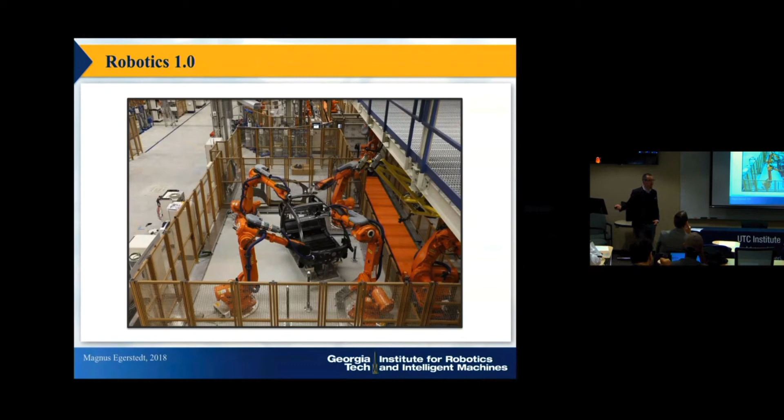Well, so here is actually, I've started calling this the Great Robot Migration. So here's what's going on. The robots are leaving Rome, and actually where they're going is not Carthage. They're going all over the place, right? So we're seeing a lot of robots on the farm fields. So precision agriculture has become a major force in robotics. Part of it is farms are not that complicated, meaning, corn rows are nice and straight, and there are very few stray puppies and bicyclists running around.

We're seeing warehousing being largely robotic. Amazon Robotics now claims to have completely dark warehouses, where there are zero people, only robots. I have a former student who works for Amazon Robotics, and I asked if this was really true. He said, not exactly, because people still have to go in every now and then and clean up after the robots. So we're becoming cleaners for our robotic overlords.

We see robots in our homes, on the battlefields, in hospitals. Medical robotics is a major driver. As they leave their cages, they go all over the place and change their morphology or form. Robots are no longer just these things; they are flying, rolling, slithering things.

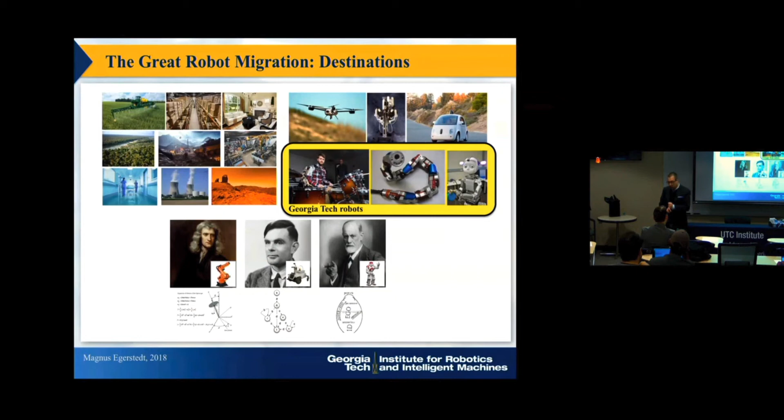You need to understand perception, learning, AI, and psychology. Human-robot interaction is a major thrust. NSF has something called the National Robotics Initiative that is entirely focused on trying to bridge these three gaps. This is what makes it kind of interesting, challenging, and satisfying to run a robotics institute.

I want to show you how we are organized to actually address this. We are lined up around three thematic areas. One is autonomy—robots out in the world making decisions based on what they see. These may be rolling, hopping, swimming, flying, or walking robots.

Then we do quite a bit of work on human augmentation—robots used to make the human experience richer. This could be orthotic or prosthetic devices, or exoskeletons. Medical robotics also falls under this category. And then we do a lot of work in collaborative robotics—robots and people doing things, typically in a manufacturing setting.

We are one of the largest institutes on the planet. We have 85 faculty members in robotics. We started a robotics PhD program recently, and we're now up to 70 robotics PhD students. We do around $33 to $34 million in sponsored research every year. That's the kind of institute I run.

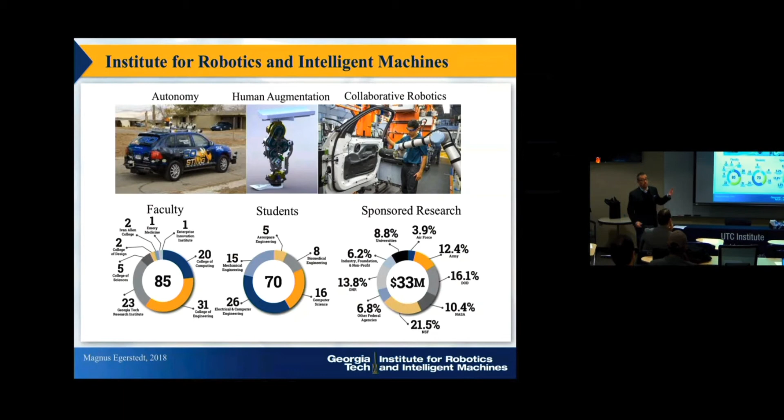I've actually learned quite a bit today from talking to people involved in the institute we have here. So having said that, let's actually get back to the talk.

When I give talks, a lot of times I talk about how you structure interaction models for large teams of robots. Let's say you're all robots. Congratulations—you're also kind of not that talented, to be honest. You can't see very far, you have limited communication capabilities, maybe limited processing capabilities. But I'd like you to solve a task: let's say I want you to form a circle. How do you, with very limited information and only local rules, move around in such a way that you form a circle?

Or maybe more importantly, I learned there is special artisanal UConn ice cream somewhere on campus. So what if I sent you all out to get me ice cream? Please don't leave—but what if? How do you organize yourselves so some of you go out, cover the area, look for ice cream, some of you carry the ice cream, but then your hands get too cold, so you hand it over to the next person? What is the mechanism by which we do this?

Ten years ago, we really didn't know all that much about how to structure multi-robot systems. Fast forward to today, and we really have understood quite a bit.

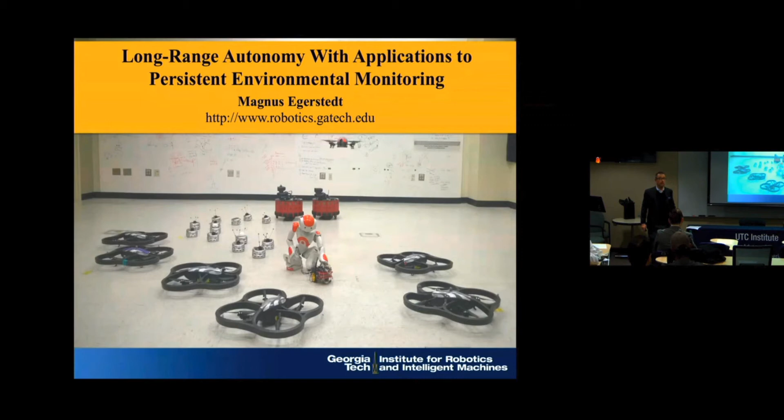So a normal talk that I would give would talk about this, and then I would end with a slide kind of like this one.

So here I have 15 robots that are, in this case, spelling grits, because I'm the director of the Georgia Robotics and Intelligent Systems Lab. What we're doing is broadcasting what letter they should shape—let's do I. They know the geometry of this, what I looks like. And then they need to figure out where to go in the I, how to assemble it so that they don't collide.

In this case, it's based solely on sensory information, so no communication, with local rules. And again, 15 years ago, we didn't know how to do this. Now we understand quite well what the right mechanism is for doing this.

So this is a typical last slide. I think it's a good ending to a talk, right? Because we show robots doing interesting things.

But what I've gotten really interested in over the last 5 years is this question: what if you wanted to do this out in the snow instead? Or you wanted to do it in the fall, and then winter came, and there was snow, and then it stopped snowing, and then it's April, and it's snowing again. How does that change the design paradigm?

So one thing that's clear is if I try to design my system so that I enumerate everything that the robots are going to experience through their journey through the snow, then I'm doomed to fail, because stuff is going to happen that we can't predict. So somehow we need to be flexible enough to handle things that aren't part of the design.

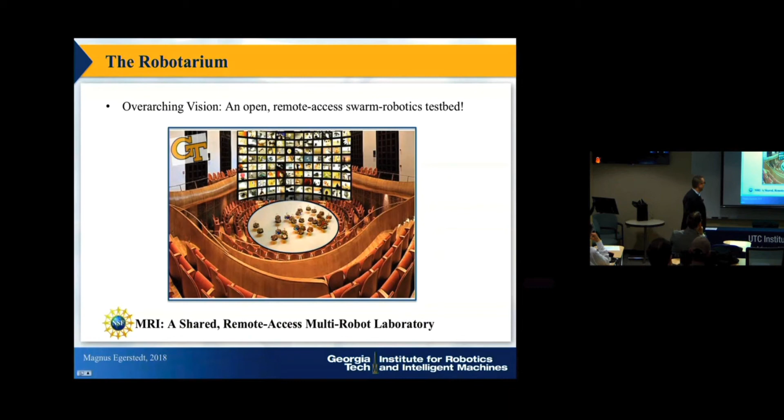And I went to the National Science Foundation, and I said, here's what I want to build. This is actually the Vienna Chamber Orchestra's concert hall with Harvard's kilobots on them and some random stuff and a GT logo on it. And NSF, they said, sure, do it. So this is what I built. Not quite the Vienna Chamber Orchestra. Actually, this was an early version.

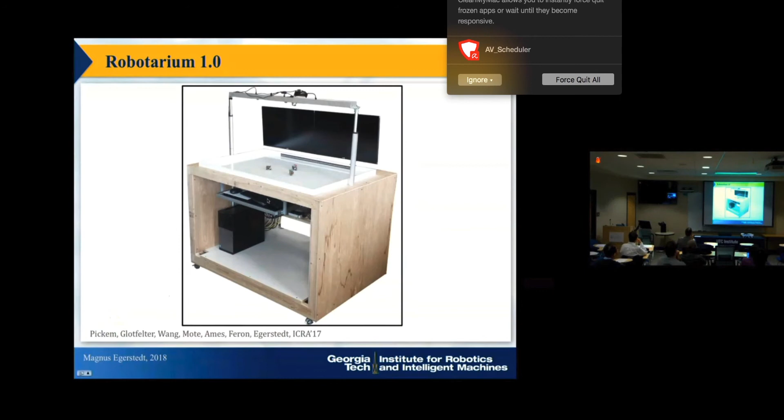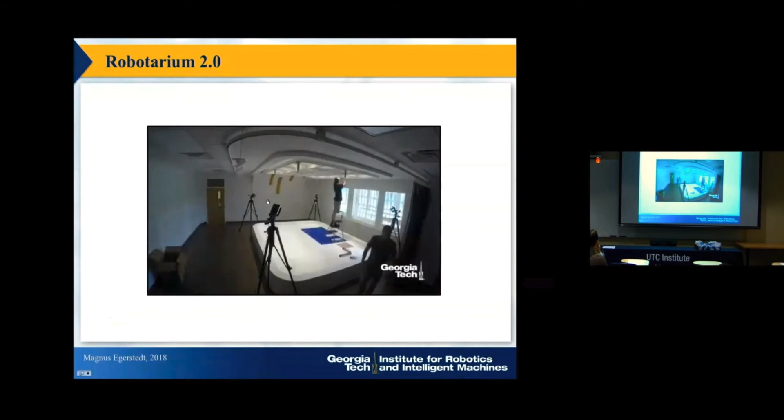But the point is, we built a remotely accessible swarm robotics lab. Actually, now it's looking quite charming. So we built a facility that went live in August of last year with 120 ground robots and 30 aerial robots. And this kind of became a big deal.

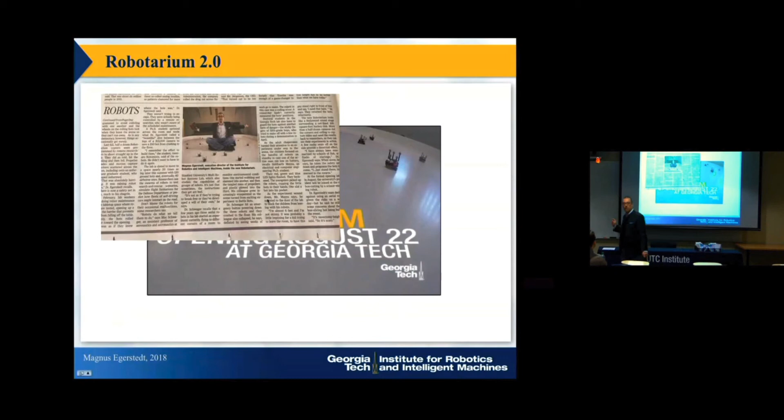I was on the front page of the Wall Street Journal with the headline, this lab has no idea what its robots are doing. But the idea was very simple. Users upload code, run it on the Robotarium, and get the data back.

The problem is, let's pick someone here. What's your name? Evan. Evan. You seem completely reasonable.

Well, we don't know, right? So you upload code, and how do I know you don't break stuff? Even if I don't know, especially in the air. The problem is that stuff happens in robotics, right? So here's Evan. He's telling my robots to do something, and you weren't that reasonable. Yeah. Stuff happens all the time. So how do I make Evan be allowed to upload code on the Robotarium without him breaking stuff?

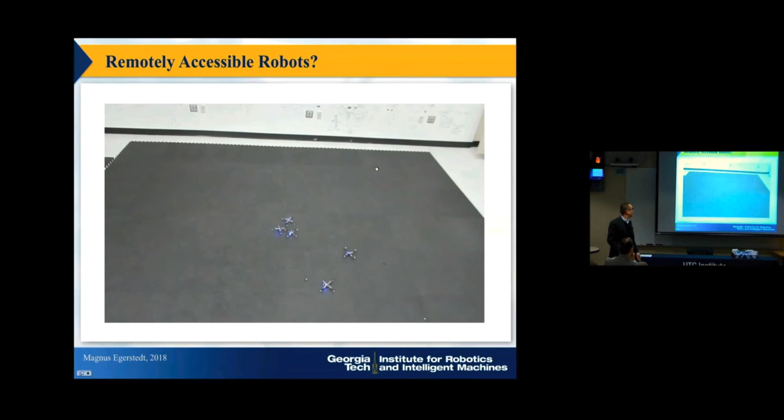And the biggest question is really a question of collisions, right? So how do you avoid collisions? This is, I think, the most famous robotic collision. This is the DARPA Urban Challenge 2007. Here's MIT's car, and here's Cornell's car, and they're autonomously driving into each other. They're still actually bitterly arguing over who was really at fault.

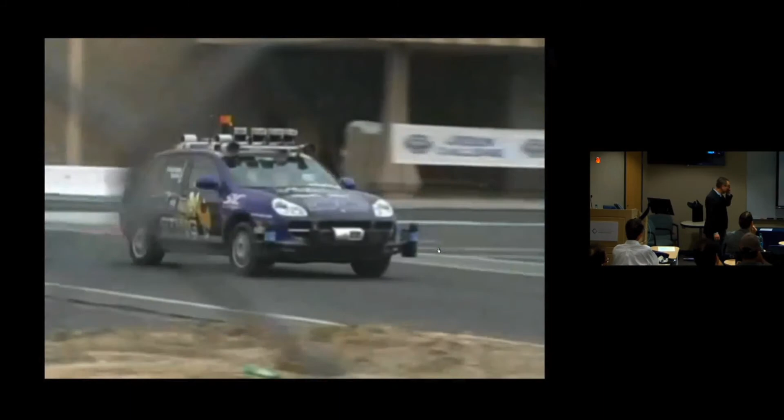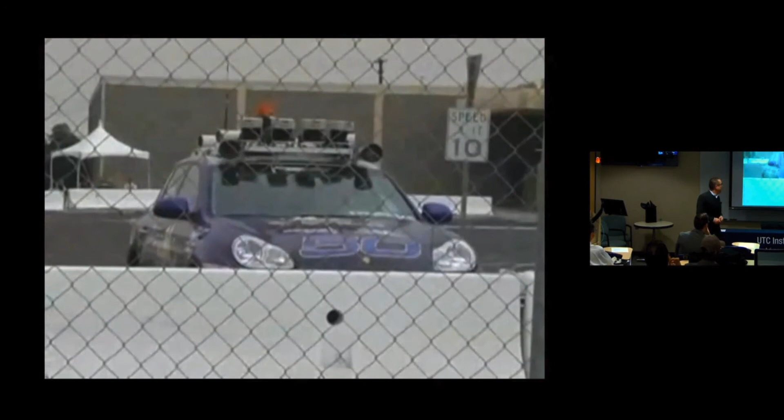But I also had a car in the Urban Challenge. It was a beautiful Porsche Cayenne. Let's see if volume works here. So here it is. Yeah, it was great. It was doing really good. And then we can laugh about it now, but it's a year and a half of my life that just... anyway, point being is collisions are bad, right?

So let's not have collisions. Let's have Evan upload his code, and somehow what we're going to do is we're going to wrap safety behaviors around it. So the standard view in robotics is you add a collision avoidance term, and there are as many collision avoidance terms as there are roboticists. That's one of the first things you do. You write it down. The problem is that they're all hacky, meaning, let's try 1 over distance squared or something.

And they work fine if you're building a robot that's out in a museum somewhere, not slamming into paintings and people. But as the robot density goes up, if you haven't thought through what the collision avoidance behavior should truly look like, all the robots will be doing is avoiding collisions, because that is just going to start dominating. So we actually had to take a step back and reimagine what collision avoidance should actually look like technically.

Another way of saying that is if you take the joint state, so there is some set S, which as long as the joint state is in that set S, then it is possible to not collide. If you get to the boundary, then it means you better take evasive maneuver, evasive action. If you don't, you're going to collide. And if you're on the outside, you may not have collided yet, but at least you know that there's nothing you can do to avoid collision.

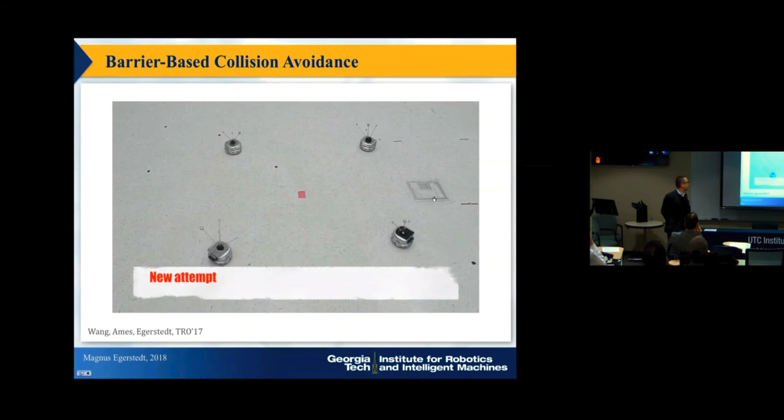And if we do that, we get things like this. Let me turn off the volume. So we're going to start with four robots—Evan wants them to swap positions. Sorry, I'm picking on you all the time here. So this is what they're asked to do, and now we're wrapping these barrier certificates around what's going on. So when they get to within striking distance, they evade each other. And we didn't tell them to go counterclockwise—all we said is, here's the constraint, conduct yourself accordingly. And I like it because it seems reasonable.

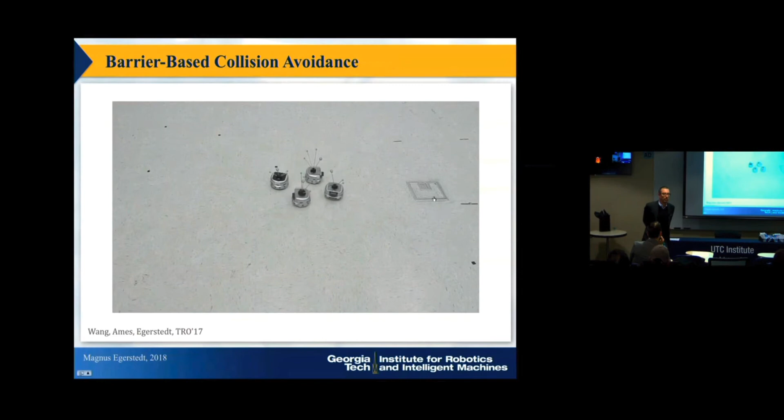This is a collision avoidance routine that is provably minimal in a certain sense, which is the sense we looked at. And you can do more robots, and it turns out that the way to negotiate traffic jams is with traffic circles.

Going back to your question, what happens if someone is not playing along? Well, it's still safe, it's just not minimally invasive. So here's a big robot that refuses to play along, and these little guys go, oh shoot, run. So it's provably safe, it's just not minimally invasive anymore.

So point being is when Evan uploads code now, that's what happens. And since we went live in August 2017, this number is close now to 400 research groups all around the world have run experiments. I'm kind of excited about it, that we're actually beginning to reach a large group of people that would otherwise not have access to these robots.

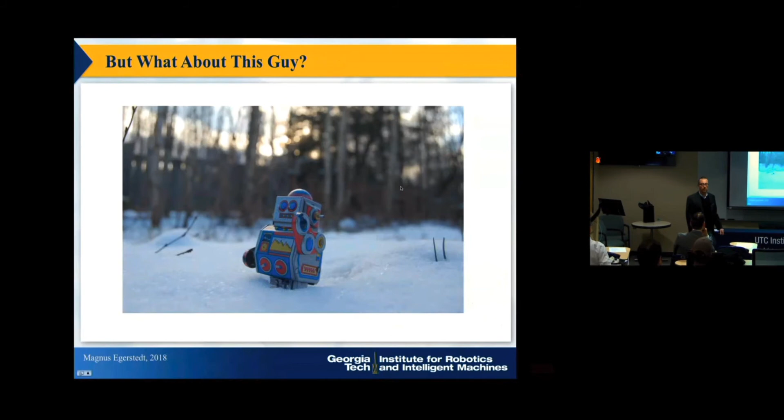Anyway, fine, neither here nor there. Why does this matter to the robot in the snow? Well, for that, we clearly need to talk about sloths.

In fact, let's start talking about leaves. Let's say that you're an animal and you like to eat leaves. You're what's called a folivore. Leaves are actually really bad food. They're structurally complicated and they're toxically protected. I mean, plants want you to eat their fruits and their nuts. They don't want you to eat their leaves, right? Because that's how you get energy.

So leaves are complicated things, which means animals that are folivores need to have a long digestive tract, a big gut to break down this horrible food. They need to be cows and elephants and giraffes. Big. Cows even have multiple stomachs, right?

Okay, so if you want to be a folivore, and you also, for some reason, want to climb trees, that's complicated, because if you want to climb trees, you cannot be too big. So there are actually very few folivores that are arboreal, tree-dwelling, because clearly if you want to be as big as possible to break down this crappy food, yet you need to be small so you don't fall out of the trees, it's a very tight ecological niche. It turns out there are only a handful of species on this planet that are arboreal folivores, and they're all between 3 and 8 pounds, and they all look like this.

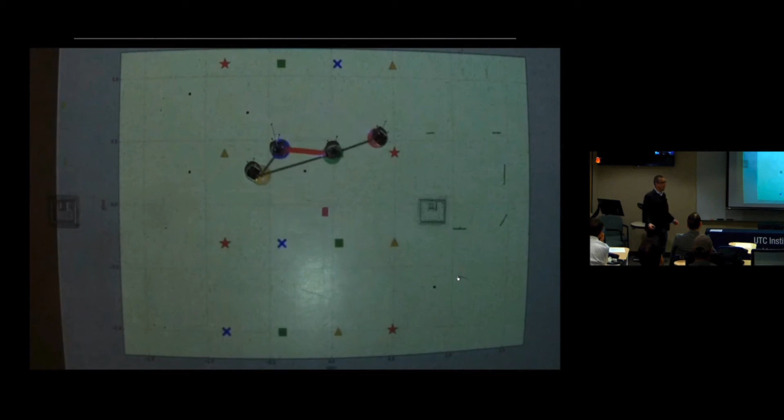And this is kind of a messy specification. But the beautiful thing is when you just run this, you get something like this. So this is what the robots are asked to do, but they can't because they're colliding. This is blue-green, this is always maintained, and these two are at least connected to one of them all the time. There are no collisions, and they're trying to follow the trajectory that's been specified as closely as they can.

And I love this because this is rich behavior. This is rather complicated what's going on, and it's entirely driven by constraints. We didn't tell them much, we just said, do all the... People write papers about connectivity-preserving collision-free coordination. We didn't have to do that, we just wrote a bunch of constraints. And to me, this is the robotic equivalent of climbing down out of a tree to go to the bathroom and then going back up. It's complex, and it was driven by constraints. So I was very happy about this as a way of actually ensuring that we could get rich behaviors out.

Cool. All right, so having said that, let's finally get to the robot in the snow.

What should the robot be doing? Well, we were interested in this question of persistent environmental monitoring, where I want to spread you all out on campus to measure something, how much snow there is, say. So the question is, how do we do this? Well, first of all, we now know that you should just minimize energy, that's the first thing. And then somehow you should spread out in some good way. And there are different ways of thinking about the spread out.

But since we're going full ecology here, why not look at the animal kingdom? So, for instance, this is actually Tanzania, there are different lion prides, and Craig Packer from University of Minnesota showed that they actually spread out according to what's called a power Voronoi tessellation, where you get a weighting based on the prevalence of prey and water. There's a termite mound, or a number of them, they form these hexagonal shapes.

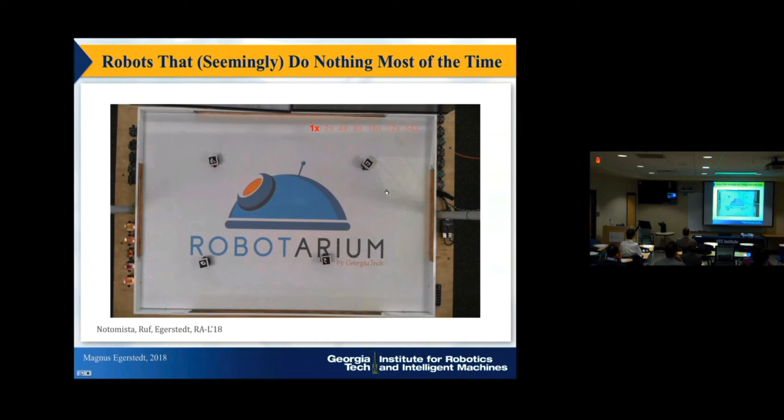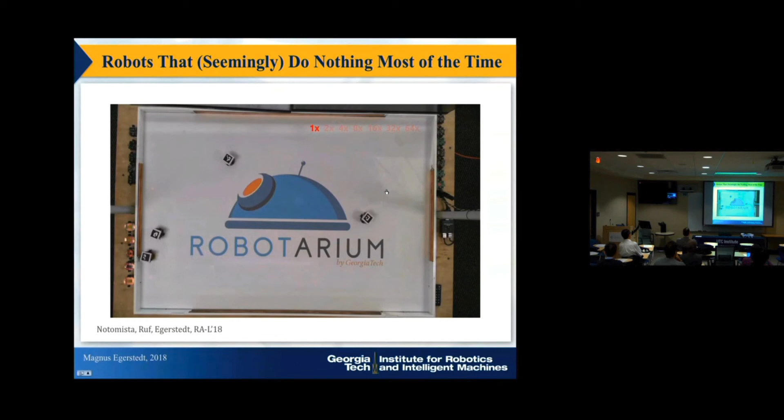I personally am a big fan now of not specifying what they're doing, just specifying constraints that come from the environment. It's a little bit of a different way of doing control design. Normally, we say here's the cost, minimize it. I'm not doing that. I'm saying spend as little energy as possible subject to these constraints.

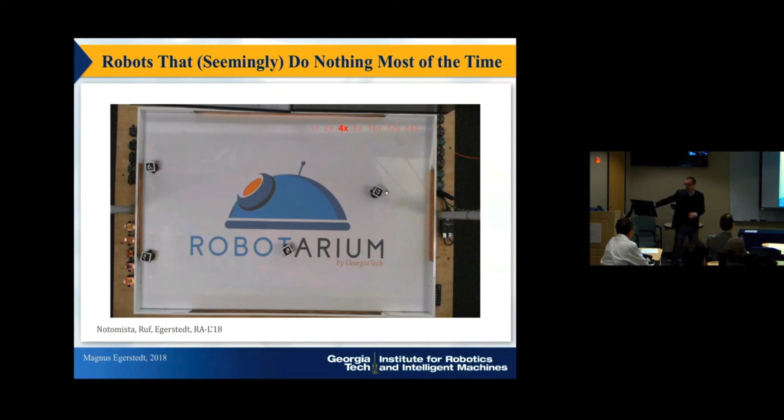To answer Peter's question, the real way I'm thinking about this is the constraint should really say don't collide and don't run out of power. Then when we want to tell them to do something, we should specify a desired controller. For instance, we could specify a coverage algorithm on top of this to say, this is what coverage control gives us, do that, but every now and then go and recharge.

In fact, in the Robotarium right now, since this is on 24/7, it's been on for 3 months since the last checkup, this is what they do. They go out, do their stuff, and some get pushed back to the charging stations. When one gets pushed back, another comes out. This is what Evan is doing. So this is still the survival constraint, but the taskable missions sneak in through 'you desired.'

There's a new NSF program you may be aware of, called Smart and Autonomous Systems. They're still trying to figure out what this program is about, but it's really autonomous systems that are out for long periods, learning from the environment, learning from each other, learning to be ethical. We propose this as an autonomy-as-a-service concept, where robots are out there, and you recruit them through the 'you desired.' The second call is coming out next week, apparently, so be aware of it.

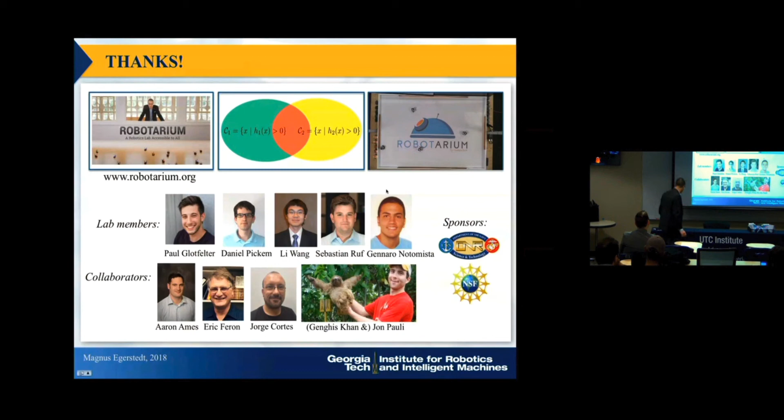Combining constraints or sets is natural: you want to do this and that, boom, it's just an intersection. So there's something canonically nice about sets that's not nice about adding costs. I'm still going to do a lot of optimal control, but there's something nice about this, I think, at least intellectually speaking.

And then this here is the robots that do nothing. This actually looks like a picture, but it's not. They are moving, but this is what it looks like in real time; the video we saw was scaled up 16-fold.

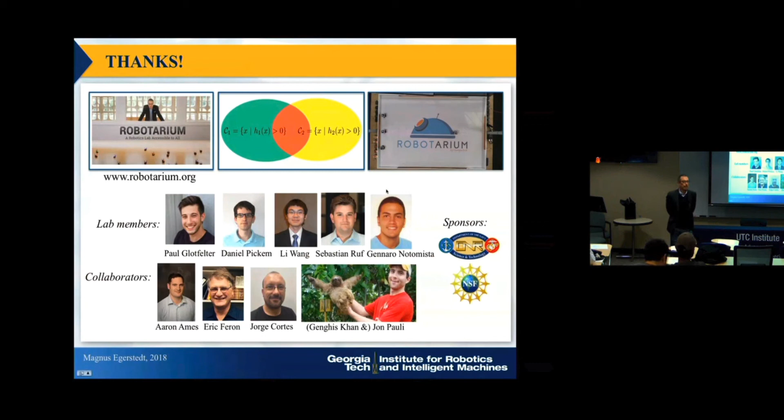So the constraints just plop out from, if you have a control affine system, so x dot is f of x plus g of x u, then life becomes very simple because u just plops out. Let me instead of talking about math, let me show you. So this is just saying h dot, which is this plus that, greater than or equal to that. And if the system is control affine, which any reasonable robot is, at least if you squint a little bit, then this is a quadratic cost in U, and it's a linear constraint in U, and there's nothing integerish about it at all. This is just the Boolean operators.

So now the cool thing about the Boolean is I did not want to integer anything, so I replaced it with mins and maxes, because those operators are continuous. They're not differentiable, but they're continuous. So it allowed me to get things that I could just write down as a single h. It's just an h that involves mins and maxes.

And then I can still, since I'm in the business of feasibility, right? I'm not trying to maximize or minimize something complicated here. I just want a feasible solution. If I can formulate my h as a continuous function, then we're all good. And again, h is a function of x, not a function of u. And the thing that I'm minimizing over is u that falls out here. So if I wanted to minimize this with respect to x, my life would be horrible, forget it. But it's not, I'm minimizing with respect to u. I should say another thing.